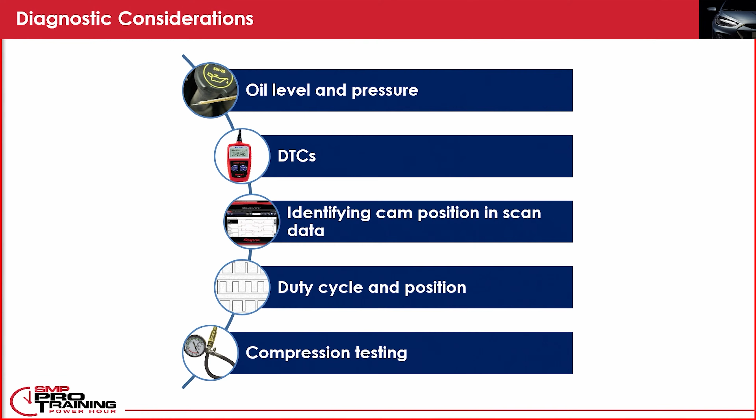We could also do some compression testing. Let's say we've got a V-style engine, a V6, with a chain going to one bank of the engine and a chain going to another bank of the engine. If we have one bank that's out of time, we'll actually catch that in a compression test. So if we did a relative compression test with a lab scope, we can actually catch that timing fault.

Now, as I said, we've already covered that we need to check that oil pressure when it's hot. And once we've verified that and we're okay with the oil pressure on the vehicle, now it comes time to look at the diagnostic trouble codes with a scan tool.

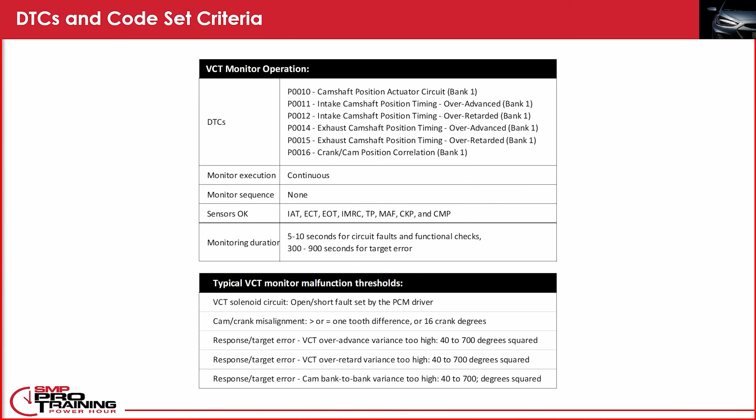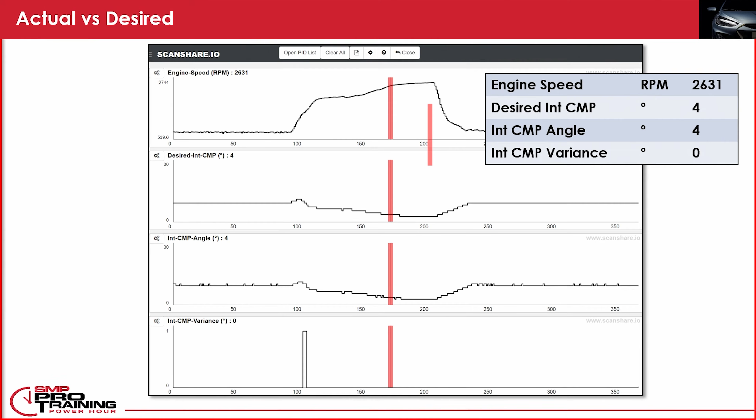Bad control of the solenoid would look something like this, where we actually can't hold it steady. The solenoid is for some reason failing to hold it in position. Now, whether that's the solenoid or possibly a phaser that can't hold position, we're going to have to dig into that. But first, now we know that by the command that I'm looking at, it can hold this one solenoid just fine, and it's not actually controlling the other solenoid fine.

Now, with that being said, that's all easy and good when we're talking about it on a slide. It's another thing to go on the vehicle and actually look at that scan data. So with that in mind, we've got a Chrysler 200 in the shop right now. We're going to go on the scan tool, and we're going to actually look at some data on this, look at the scan data for VVT, and we'll go through the PIDs that are on the vehicle.

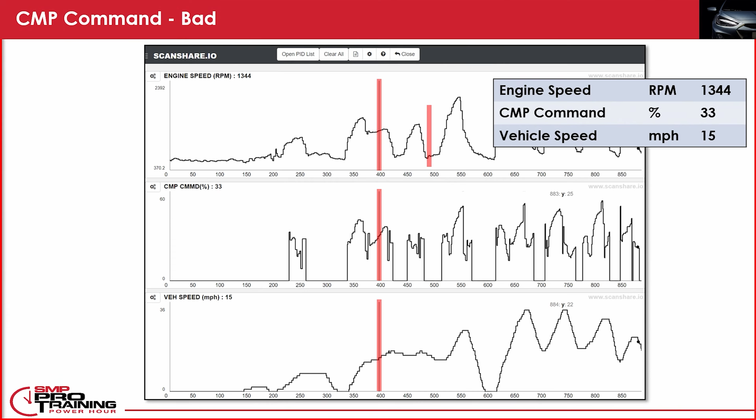All right, Corey, you can start the vehicle for me, please.

All right, we've got the vehicle running. I've got the scan tool already hooked up. We had it keyed up, I identified the vehicle, and now we're going to go through the data. You can see that we don't have a specific spot where it says we can go to timing data, so I'm going to go to live data.

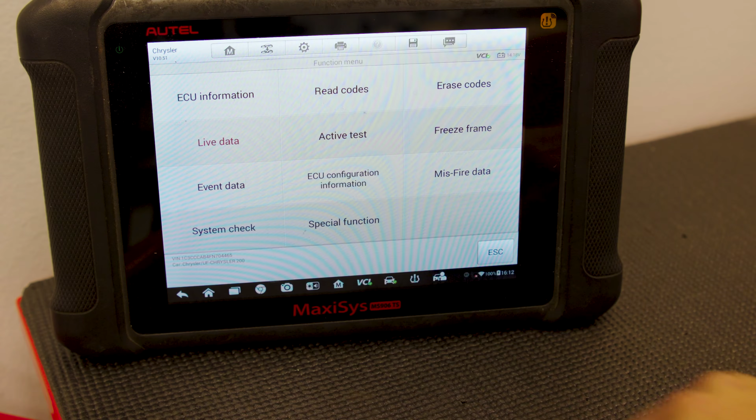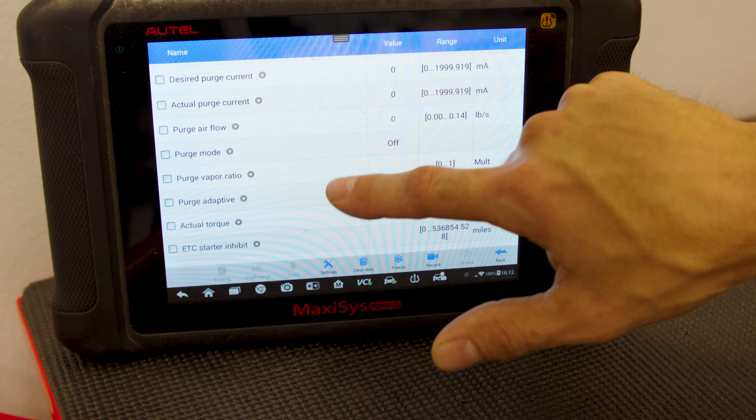Once we've got the data selected, it's going to take a second to load all of the PIDs. You're going to see that we've got a lot of data to cover on the vehicle. I'm going to start scrolling through here, and like I said, it depends on the vehicle what cam and crank PIDs we're going to have. I'm going to scroll through, and I'm already pretty familiar with this platform. We're actually not going to have desired and actual on this vehicle itself. We are going to have some cam and crank sync PIDs though, so I'll just keep scrolling through.

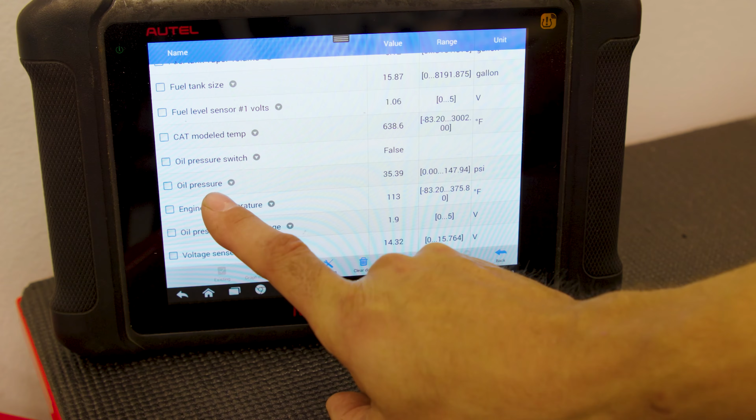Another thing to keep in mind is, like we said on the PowerPoint, we've got an oil pressure that we want to make sure we've got good oil pressure to the solenoids. Here is a good place to double check that as we get the engine hot.

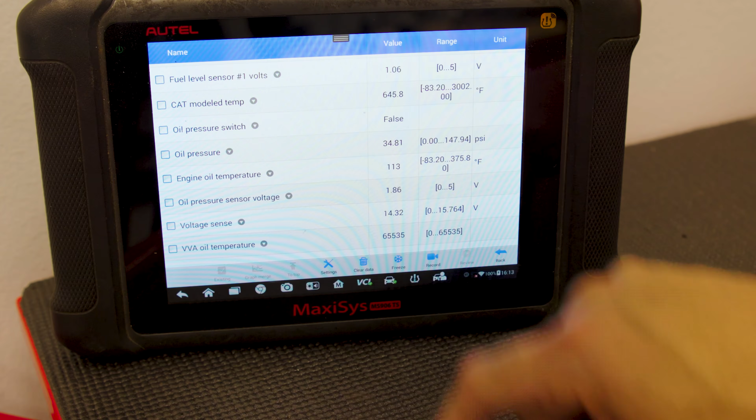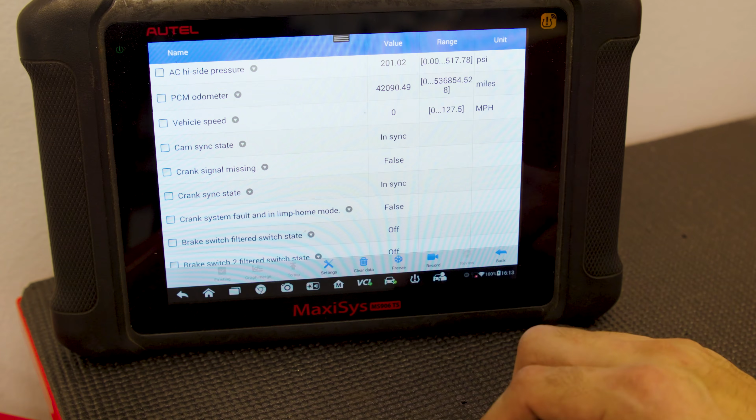If we keep scrolling through, we're going to get to cam and crank. So here are the cam and crank sync. If we have any faults at all, it's going to say true to having a fault, and we're going to be in a limp status. Also, it's going to tell us, is the crank signal missing? No, it's not. Yes, it's in sync. This is very typical for Chrysler. So as far as scan data goes on this vehicle, this is what we're looking at: crank signal missing, crank sync state, and do we have a fault in the system?

Other than that, there isn't a desired and actual on this platform using this tool. So we're good with scan data. We've got no trouble codes, the scan data is okay, and with that, we're good to shut the vehicle off. Corey, you're fine to shut the vehicle off now, and then we'll go back.

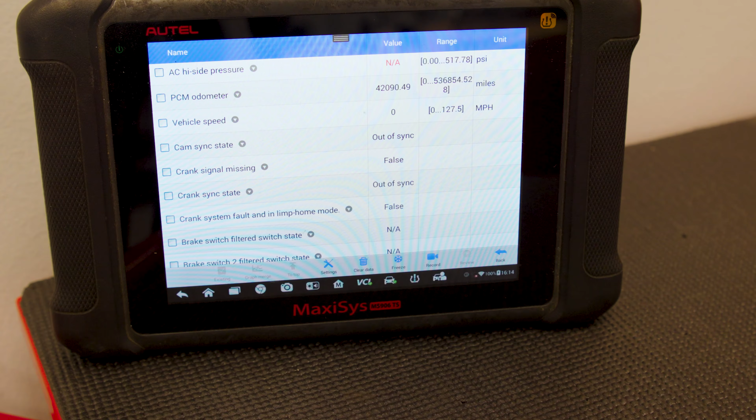Coming back from the scan tool, we've looked at some of the scan data. You can see just from the example we showed on the PowerPoint, the data PIDs vary by vehicle. So we want to make sure we look at what's available for our vehicle, and I'm going to try my best to analyze what data PIDs are there, if it just says cam and crank sync, or if it's got the actual and desired.

One thing I wanted to cover is where does all of this information actually come from? It's going to come from the sensors. So these position sensors, I've got a couple right here. We've got cam and crank sensors, and they tell the relationship based off of this reluctor on each gear that we've got. So we've got a crank gear, and we also have cam gears, and we're going to have a reluctor on each one of these shafts.

Whether it's on the gear physically or mounted on the shaft, we're going to have a point of reference. You can see 2 small tabs here and then 3 small tabs on the bottom of the phaser. Now, all of these will vary vehicle to vehicle, but they are going to have a point of reference to look at, and the sensor is going to be watching that.

One of my tips here is that we've got to make sure we're putting in a quality sensor. Here we've got one of our sensors that is a quality sensor, and it can determine the rotation direction, positioning, everything like that with how the component is actually rotating.

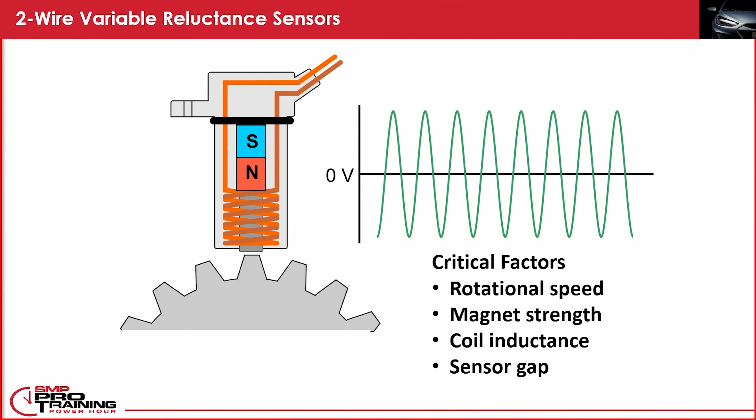The next type of sensor is going to be the 3-wire digital sensor. Now this is the sensor that we've got on the bench right here. So we've got these 3-wire sensors, and these are going to be a Hall effect digital sensor. This is what we're seeing on most all new vehicles, but we do actually still see the 2-wire variable reluctance sensors in play.

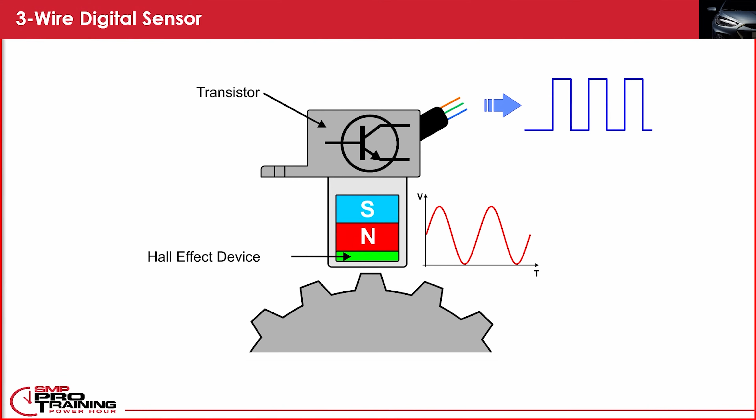The big difference between these two signals is going to be the 2-wire variable reluctance sensor will look like a sine wave, like what we see at the bottom of the screen going into the Hall effect sensor. The 3-wire Hall effect sensor takes what would have been the 2-wire variable reluctance signal and adds another device to it. So when we've got the Hall effect device and a transistor internal to the sensor, we now output a square wave signal. Now again, this is well and good when we cover it in a PowerPoint, but I want to actually show you what it looks like on the vehicle, so we're going to look at a diagram right here.

So we're looking at the PowerPoint a second. We're going to look at what the pinout would be, and I'm going to hook up a lab scope to this Chrysler that we've got. We already did the scan tool. Now we're going to look at it with a lab scope.

Corey, could you start the car up for me again, please?

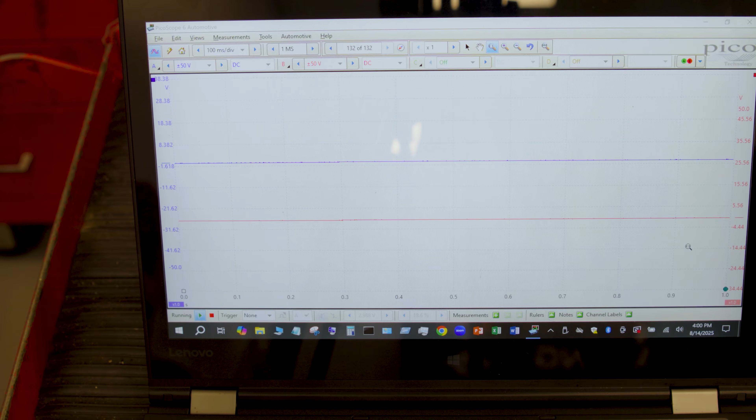So as I was saying, we're hooked up to the cam and crank, on the signal wire. I actually already made these connections. If we look at this signal here, channel A, the blue channel, is our crankshaft signal. Channel B is the red cam signal. So now we've got our cam and crank. This is only a 4-cylinder engine. We don't have multiple cam signals on here as far as bank to bank or anything like that.

So if I'm just looking for, let's say I've got a correlation code, I'm probably going to just look at a couple of PIDs and see if I've got a correlation issue between those two things, the cam and crank, that are saying there's a correlation issue.

Now, when I look at this screen the way it's going right now, I've got a really big time base, and the voltages are a little bit off. So we're going to adjust these voltages down a little bit. If we remember, these are 3-wire Hall effect sensors, so I'm going to adjust them into a range that I think will work pretty well.

Now I'm in a pretty usable place where I can look at these signals and analyze them pretty closely. You may be thinking, well, the screen I'm seeing right now is moving around a lot, I can't really tell exactly what's going on. Well, with the lab scope, we can do different things to stabilize this waveform.

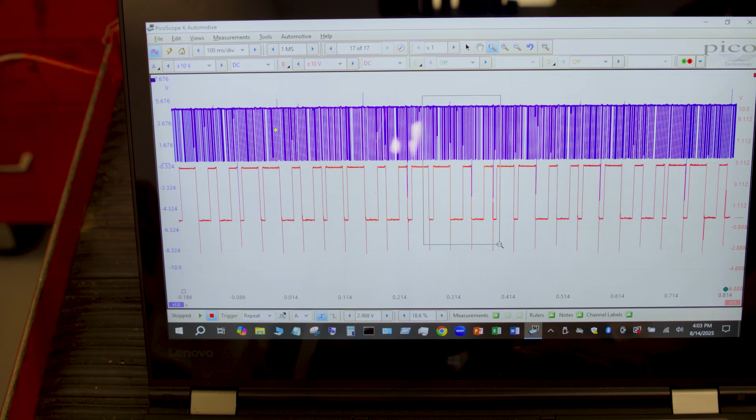So let me say I want to look at what 1 revolution of the crank looks like. We're looking at the crankshaft here in relationship to the camshaft signal. And now I can see basically my sync is going to be the missing teeth on the crankshaft signal, on the blue signal. That tells me I'm at 1 engine revolution between the missing teeth over to the missing teeth. If I'm trying to look at a known good waveform that someone has sent me, this is what I'm going to do. I'm going to measure off of those values there.

I'm going to say, okay, my missing tooth is here. The camshaft should be, looks like, 10 or 12 teeth off to the right. The known good said I'm supposed to be here. If my waveform doesn't match that, it's going to be out of time. This is how we know - if you're referencing off of a known good, how do we tell? Well, I'm going to measure the teeth off of the crankshaft and look at the relationship between cam to crank.

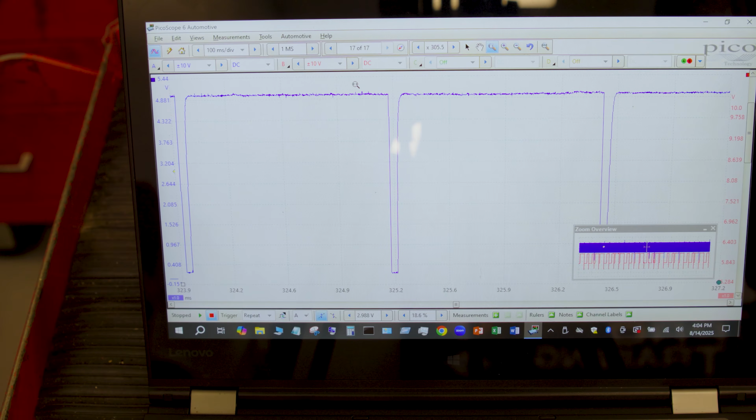Now, you may be wondering also, I said this is making a square wave signal of the teeth. Those lines pretty much look like vertical lines on the crank. Well, if we keep zooming in, I'll zoom in really close here, and you're going to all of a sudden see there's a lot of clarity to these teeth. We're zoomed out at a very big time base to look at so many teeth to see if there's any intermittent issues. As I zoom in, we can see all of the detail of the crankshaft reluctor teeth on here. If there was a damaged one, I can see a broken edge to it.

I could see that maybe the whole thing is chipped in half. This is where a lab scope is really going to shine in comparison to scan data. There are times where I may actually want to look at, hey, is this signal going in and out? I'm going to catch it with a lab scope.

So now that we've got that covered on the lab scope, Corey, you can go ahead and shut the vehicle off. And we're going to go back over here to the bench, and we'll cover the rest of what we've got to cover.

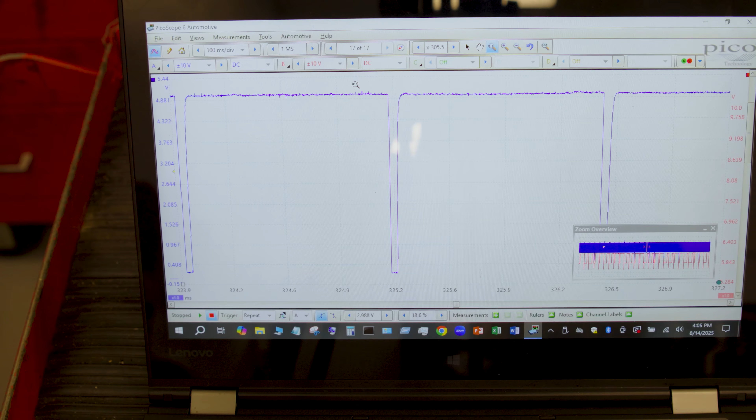So again, that's a lot going in through such a short period of time, but we've got a lot of scan data that we've got to analyze. Again, the trouble codes will lead us in a very good direction. A lot of the time the scan data is going to tell us what's wrong.

There are times though where we're going to need that lab scope to analyze, let's say we've got a magnetic reluctor or a slightly damaged reluctor where it kind of comes in and out and we've got an erratic signal. That would be a great example where a lab scope is almost preferable to a scan tool.

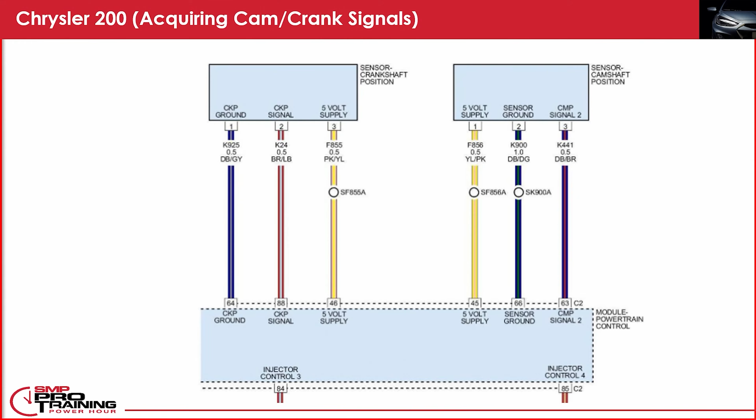Now there are some other key points that I want to make though. So let's go back to the PowerPoint slide a second. I'm going to show you something. When we're replacing all of the timing components, I've got the picture on the screen here, and we can go back to the bench now and I'll talk to you on screen.

But we've got all of the components. We've got the phasers, we've got the VVT solenoids, and we've got any of the other solenoids that we may have. Now, one of the things we want to keep in mind when we're doing this is it's a really big job.

I'm sure most of you are aware of that. When we do a timing job, some of the time we're actually taking the engine out of the vehicle to get this timing cover off. We could be anywhere from 10 to 20 some hours to do a timing job. The last thing I want to do is have a comeback after that.

And so what we recommend is replacing all of the components related to that. I'm going to do the camshaft phasers. I'm going to do the crank gear so I don't have a correlation fault. I'll do the timing chain. I'll do any of the guides, the tensioner for it as well, and the solenoids.

Now, one of the things I want to talk about with solenoids too, we've got some examples laid out here. And if you look, some of the OE samples out here actually started off with plastic screens on the VVT solenoids. After a time, these things start getting hot, they wear out, they get brittle, and they can actually break, clog some of these passages, and we have issues with the phaser sometimes sticking because the VVT solenoid is not releasing or sending oil pressure the way it's supposed to.

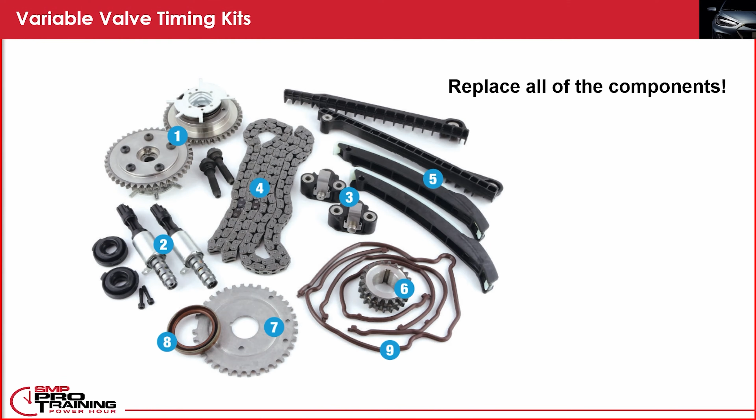If we don't relearn this, a lot of the time we're going to have random misfire codes setting from that. And so we want to make sure we take care of that by doing any relearn procedures that we need to do after all of the repairs are done.